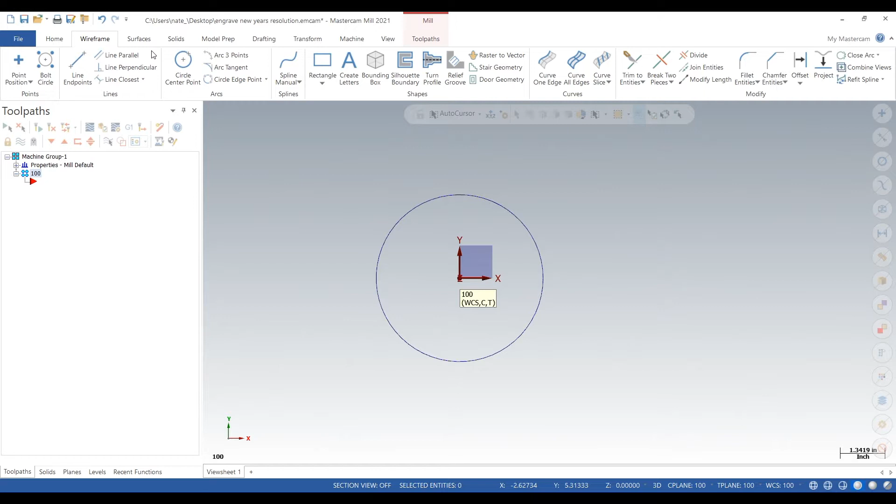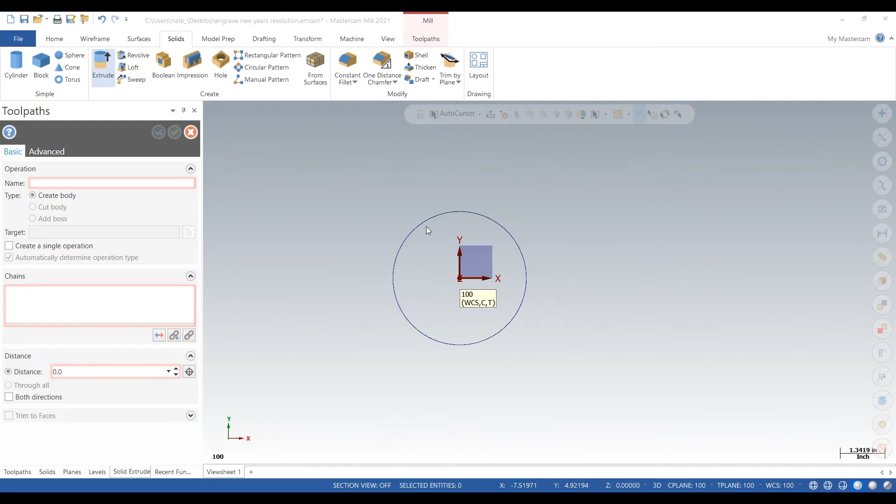Actually, we're going to delete that and we're going to make it 4 inches in diameter. That's a little bit better size. We don't want to make it too big. We're going to go to extrude, and we're going to extrude it down. We're going to make it 200 thou thick.

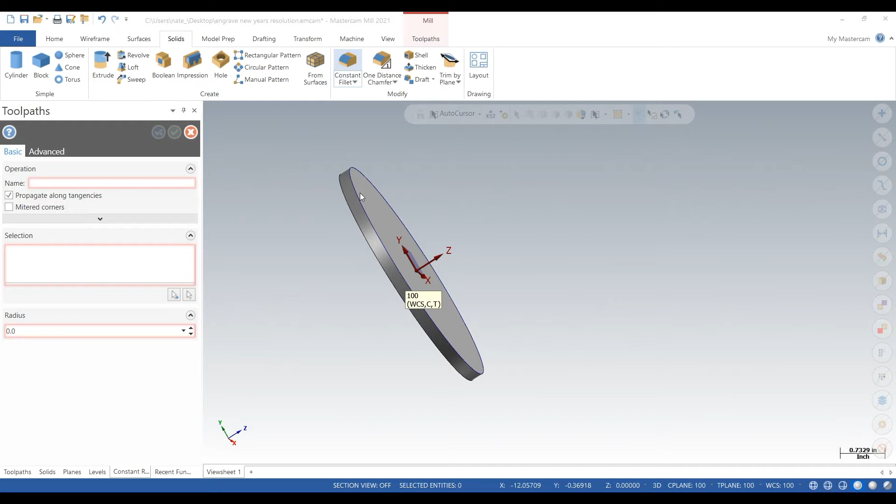Now we're just going to add some fillets on the corners. Make this nice, we don't want anything sharp. Go 50 thou.

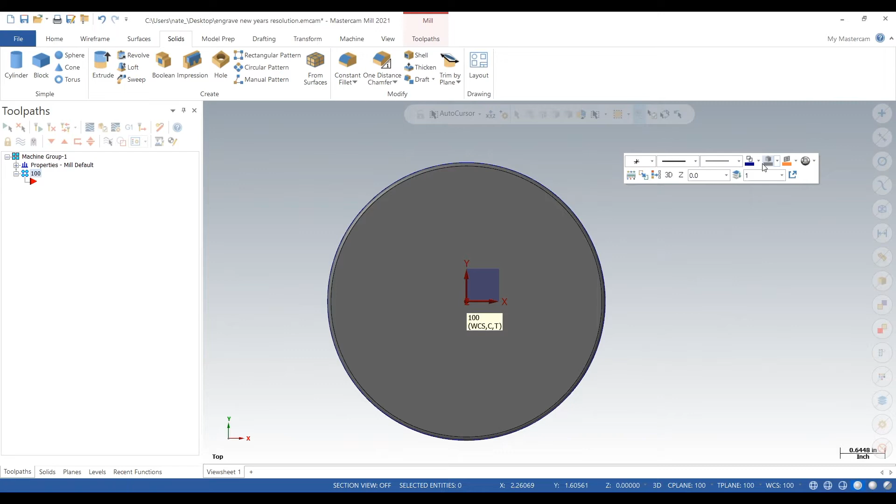Next, we're going to change the color. And the color will be green.

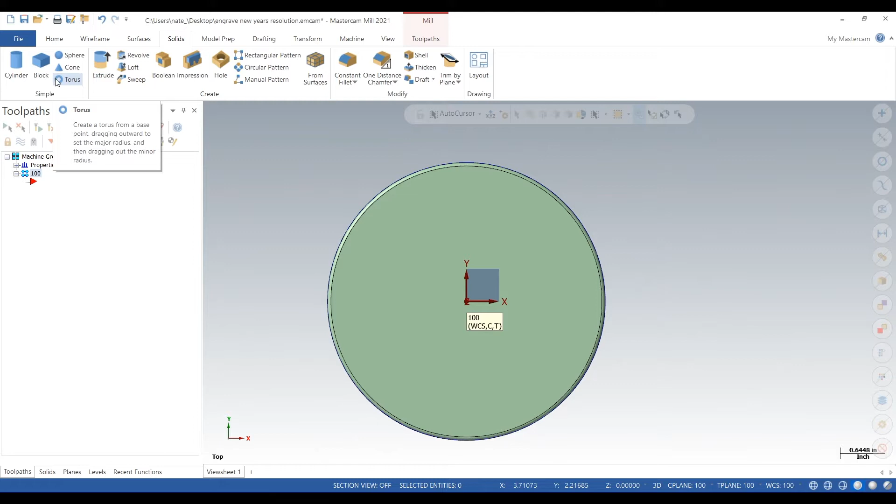Next, we're going to go over to create letters, and we're just going to type in our message. And it's going to be '2022 will be my year.' So we're going to mess around with the height so we can get this thing to fit on there. And we're doing this entire video unplanned, so we're just freehanding it basically, so it's not going to be perfect.

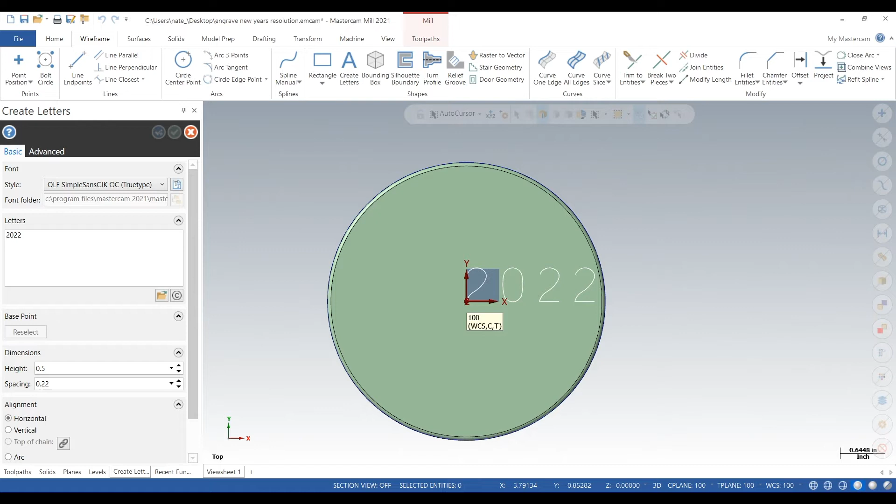Now we're going to go down, we're going to type in 'will', space, 'be', space, 'my', go down a couple lines, 'year'.

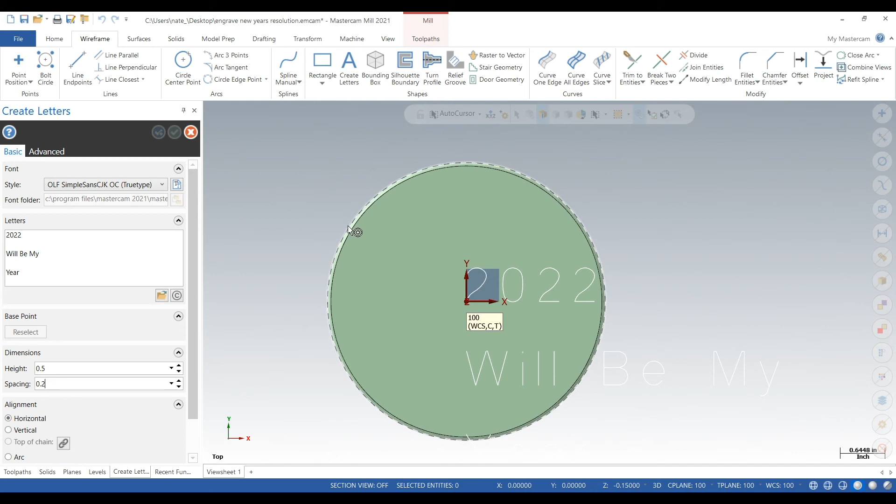So the idea is try to get this centered on this coaster. So we're going to shift things around in the letter box.

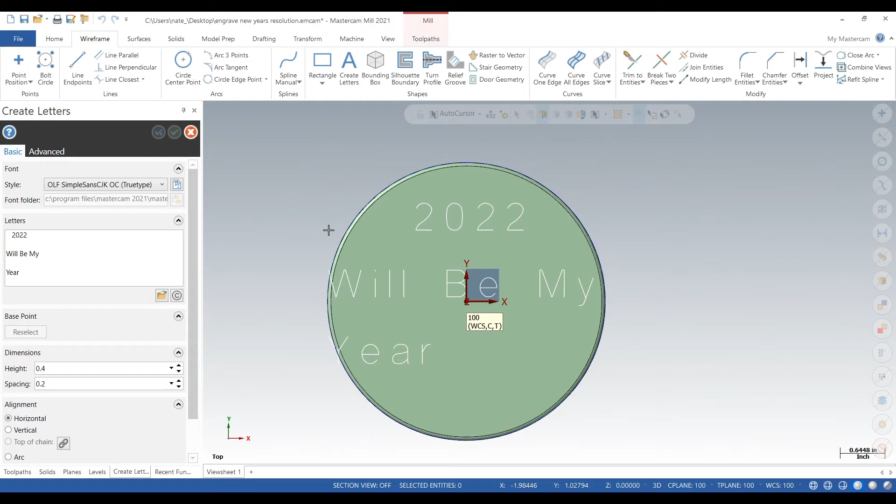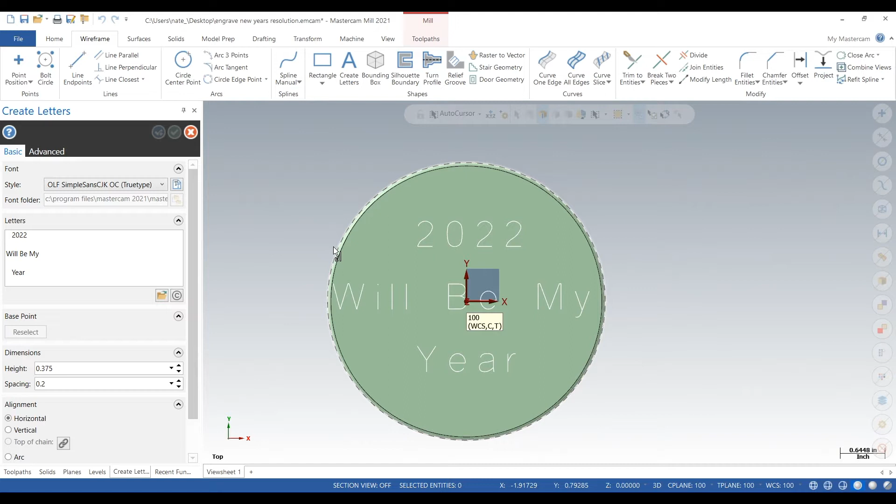We'll go down a font size. Go down another font size. And here we just kind of screw around and struggle trying to get this thing on here, but eventually we get it in there perfectly.

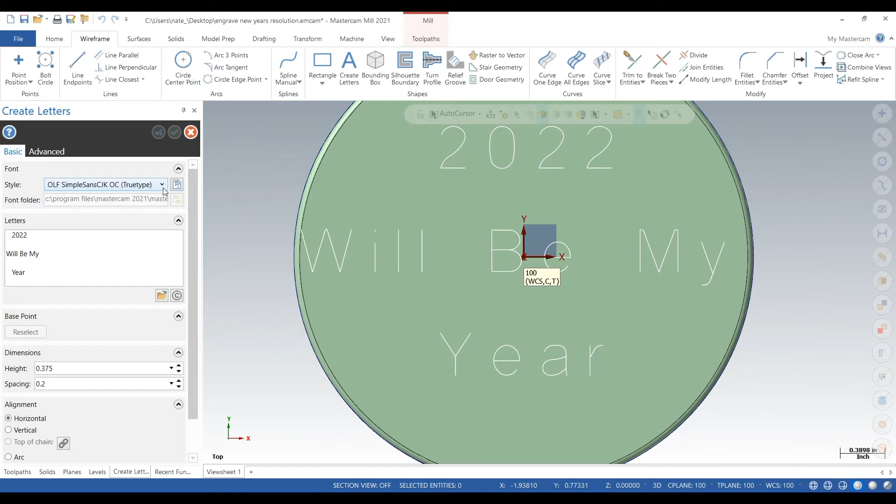Now you can write down whatever you want, actually. You can do my 2022 New Year's resolutions, whatever you want, whatever kind of cool message you want to do. And you can actually change the style of the font too. So they got all types of stuff that comes with Mastercam.

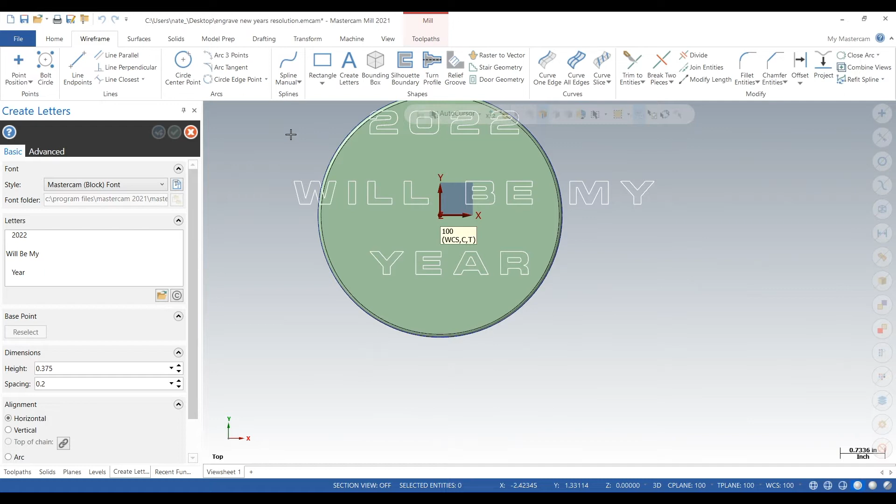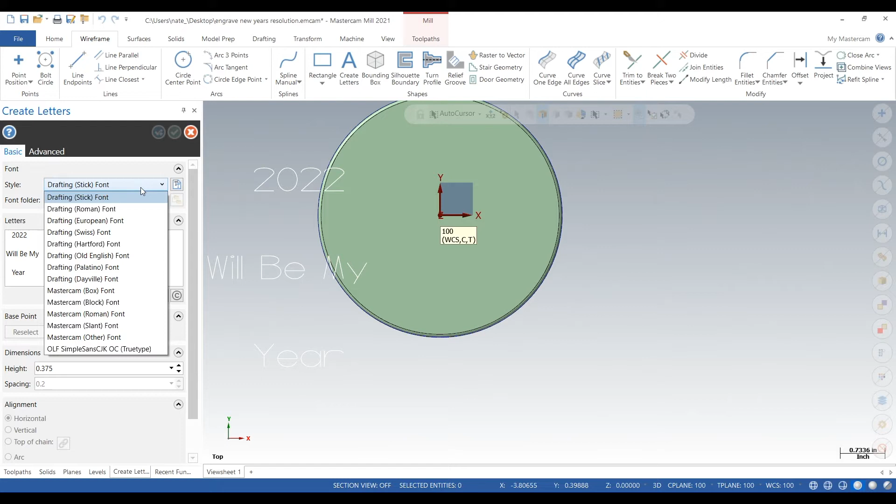Palatino, block. Slant. Roman. We're just going down to True Type.

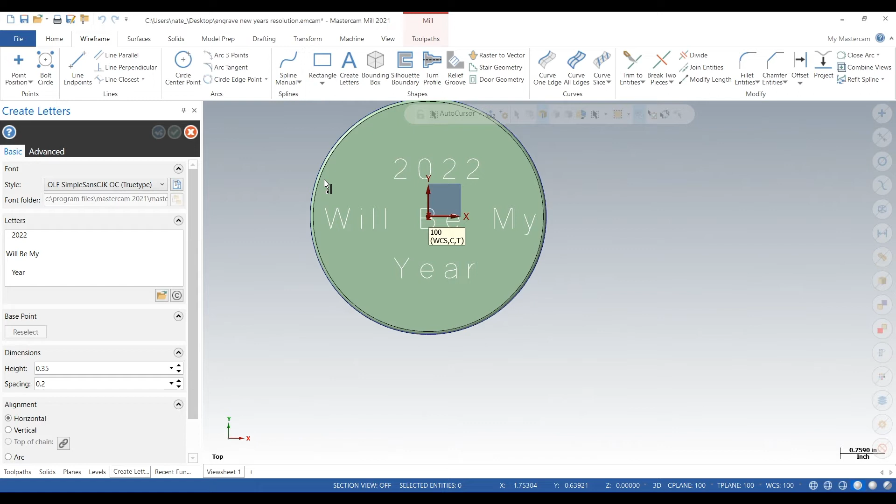So we're going to change our height to 0.35, 350 thou. The idea is to get this centered just by freehanding it. You can create a point and then find the center point of your message and then align those points. But for this video, it's just a fun little video and we're not going to get super accurate with it, just enough. So that looks pretty good.

Now that we have designed, we have made a solid, we wrote our message, now we want to get ready to machine it. So we have a plane 100. We want to go to levels, and we need to set up some levels, just so it's a little bit easier to add toolpaths. So level 1 will be solid.

Level 2 will be wire. And we're just going to move the wire from level 1 to level 2.

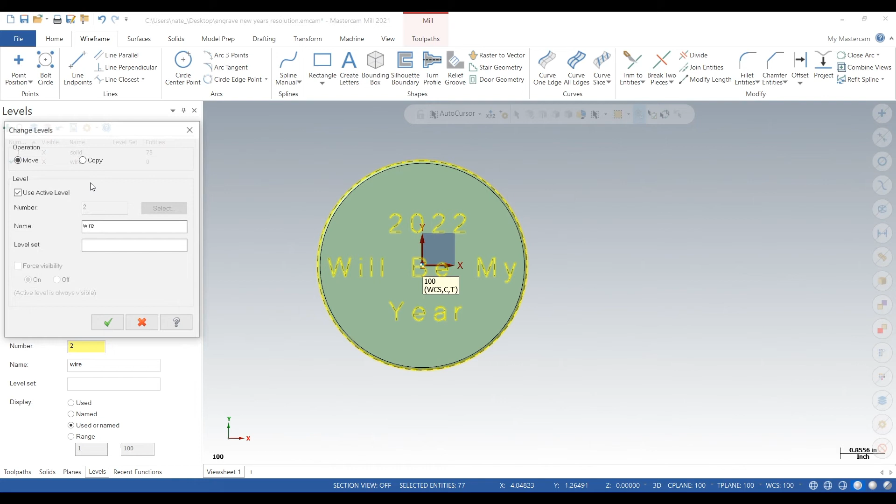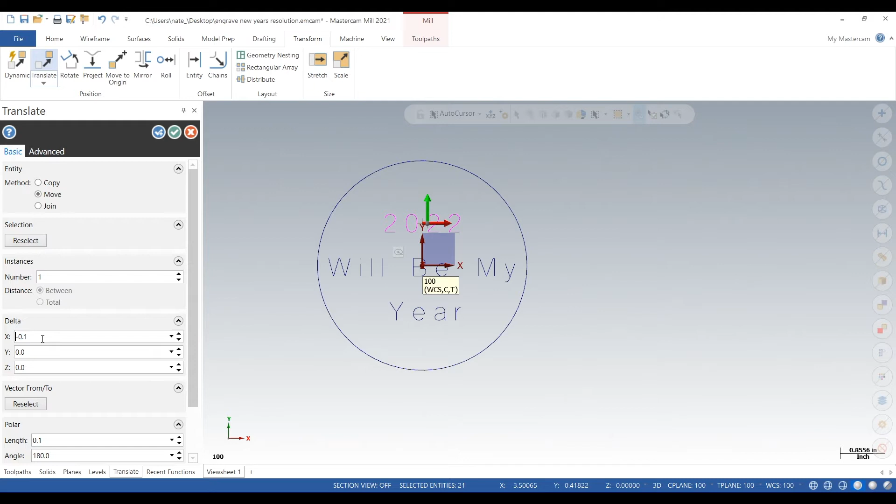Now we're going to select 2022, we're going to translate, and we're going to move this around so it's a little bit more centered. You can tell just by looking at it, it's a little off. So that looks about right. Let's clear colors.

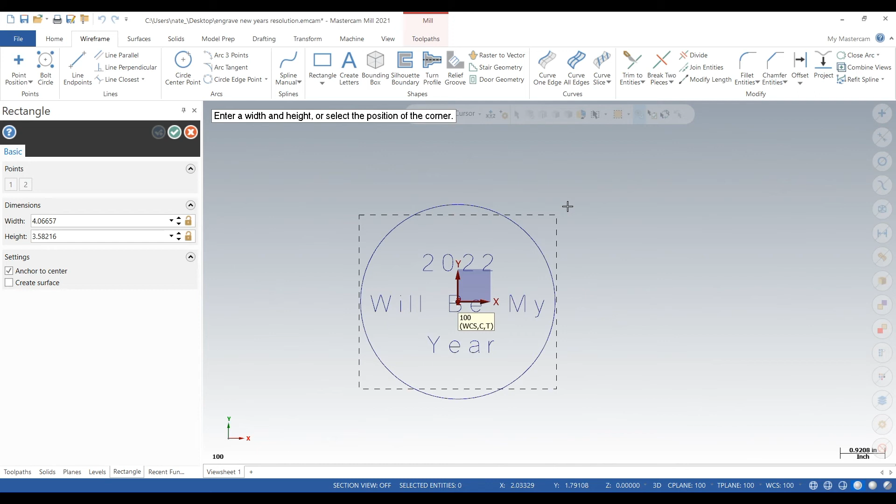Now, what's next? Now we're going to add stock. So this is just our solid piece. Now we need to add some stock so we can verify our program. Let's go 4 3/4 by 4 3/4.

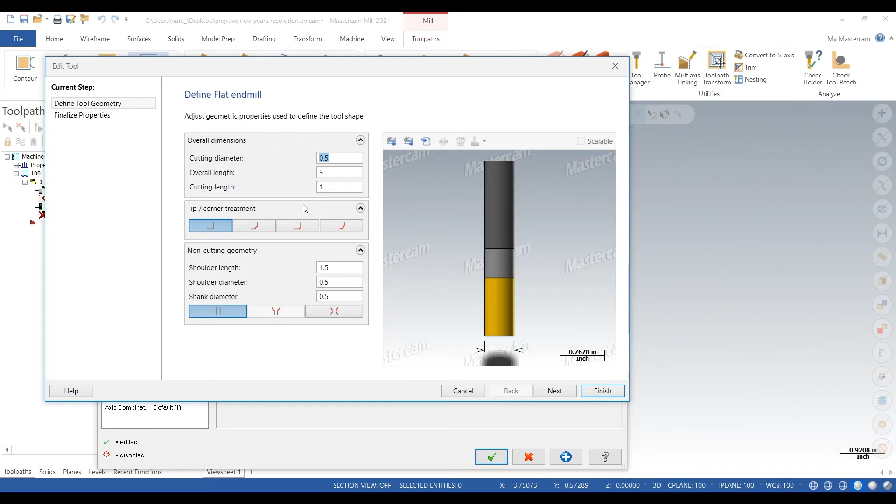And now we're going to add some toolpaths. So we're going to do a 1/2 inch end mill. We'll go to Edit Tool. And we're going to modify it and make this one a bull nose. So we'll get a 20 thou radius. Click Next.

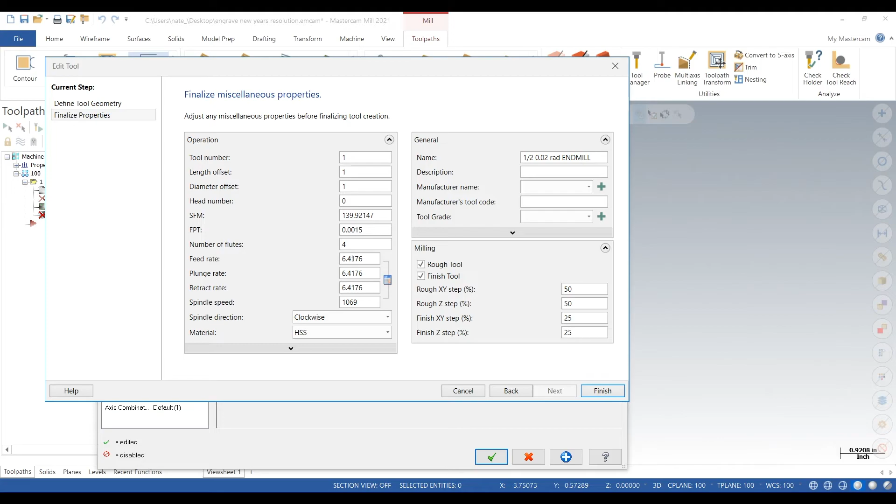Change that all to Tool 1. Change the name, see how it's highlighted? Mastercam nose, change its name to a 20 thou radius. Because if you make a setup sheet, it'll say flat, which it really has a radius, so that's important.

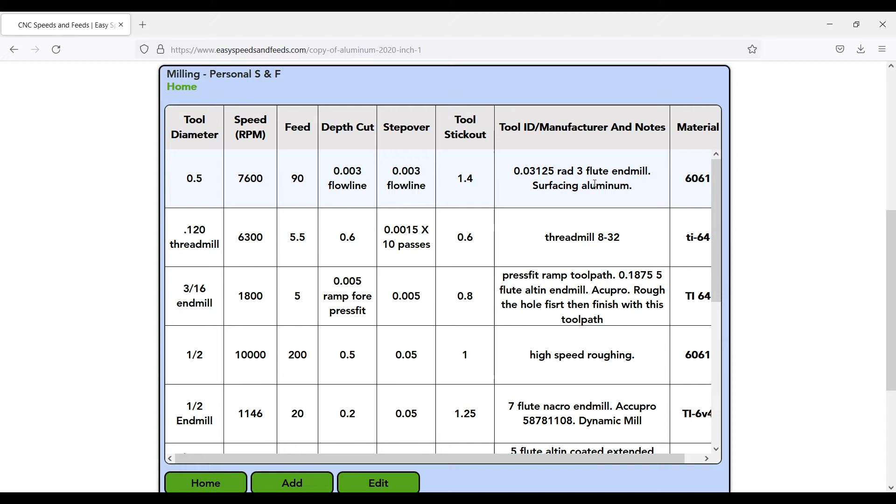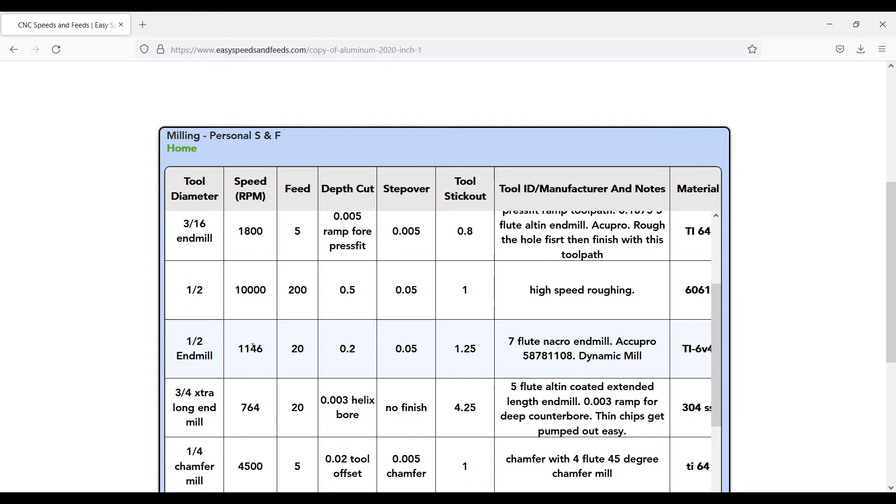So we can go back to aluminum. We have nothing, so we're just going to calculate something out real quick. And we'll give it 1,000. Teeth, we'll do 3. So we'll go 7,600 and 115 inches a minute.

Okay, click finish. There's our tool. Do a zigzag for the face. Step over, that's fine.

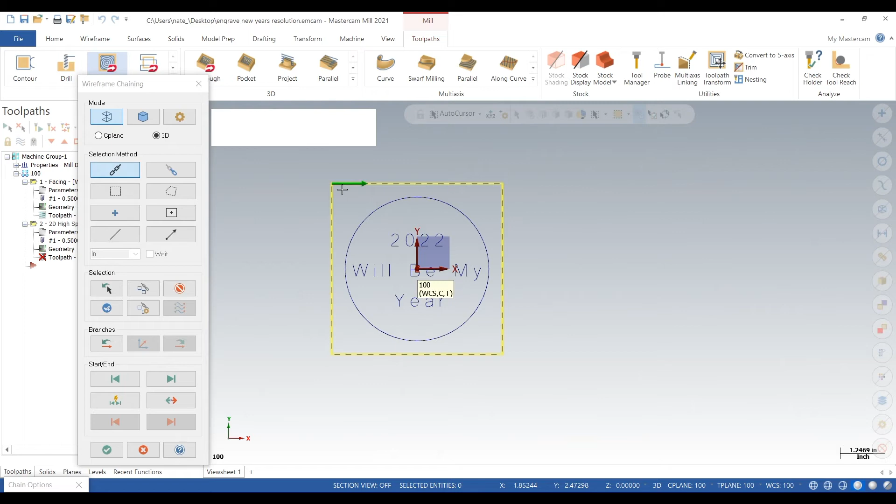Next, we'll do dynamic mill. We'll select our stock we created, and then we'll avoid the part. Click the check.

You can use the same tool. We'll hit reinitialize feeds and speeds. Cut parameters. We'll go to linking. We'll go minus 300 because it's about 200 thick.

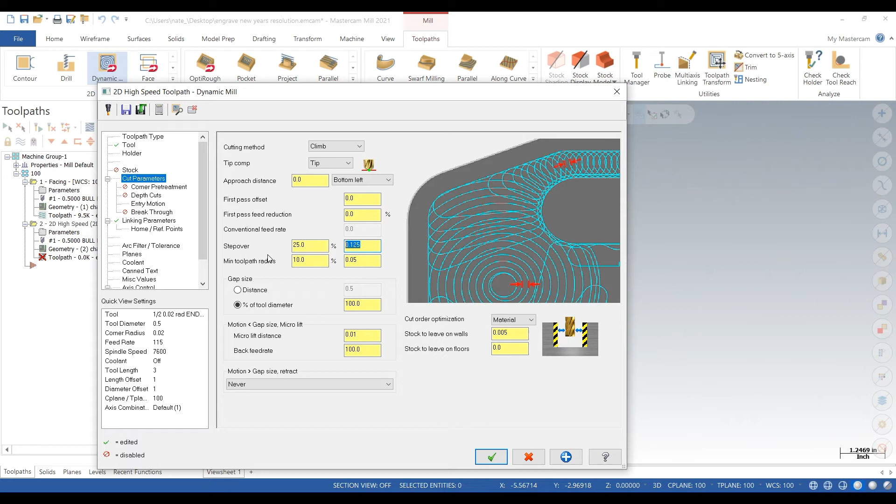Step over, give it a 125 thou step over. Click the check.

So it didn't really generate the right toolpath, so go to geometry and click from outside. It was trying to do everything inside the line, so we'll go outside the lines. There we go, that's looking good.

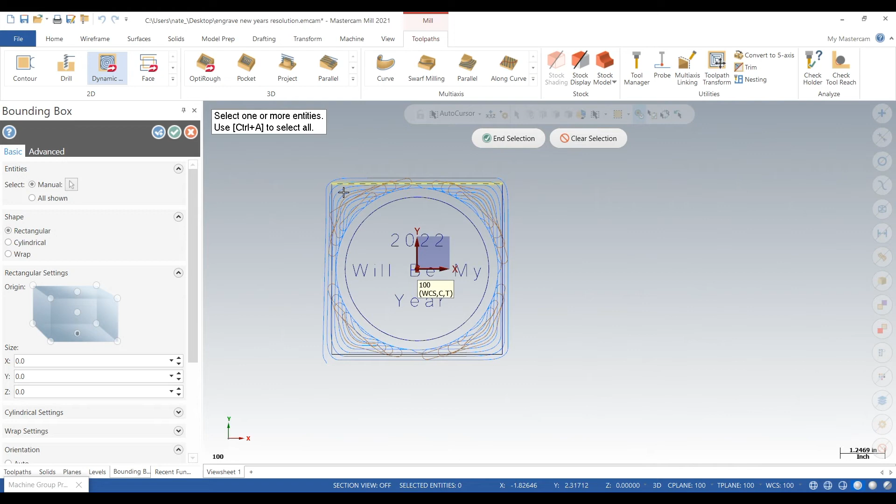Next, we'll set up the stock. Should have done this earlier, but we can do it now. We'll do a bounding box, and we'll just select what we drew earlier, that 4 3/4 by 4 3/4. Plane, use the top plane. Our stock is 1/2 inch thick. Select the center where our plane XYZ0 is.

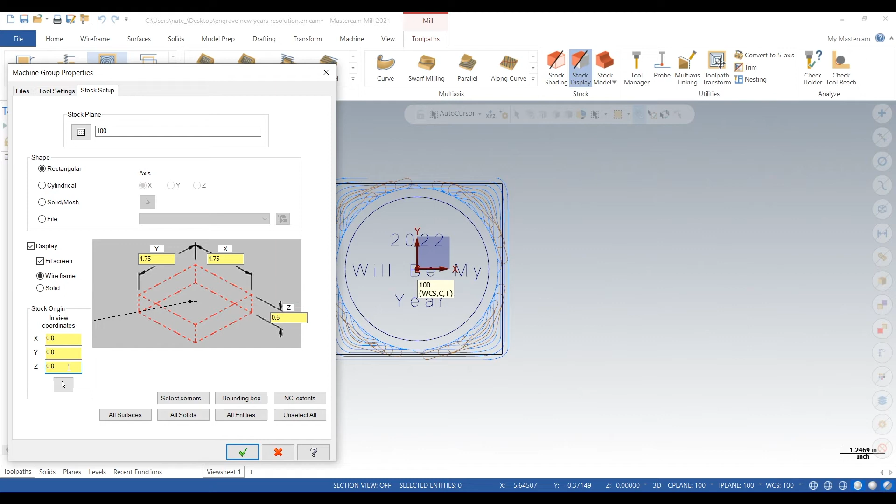And we're telling it is 10 thou. Our work coordinate 0 is 10 thou below the stock, so it's going to take 10 thou off the top if it machines to Z0. So we're going to do a quick verify.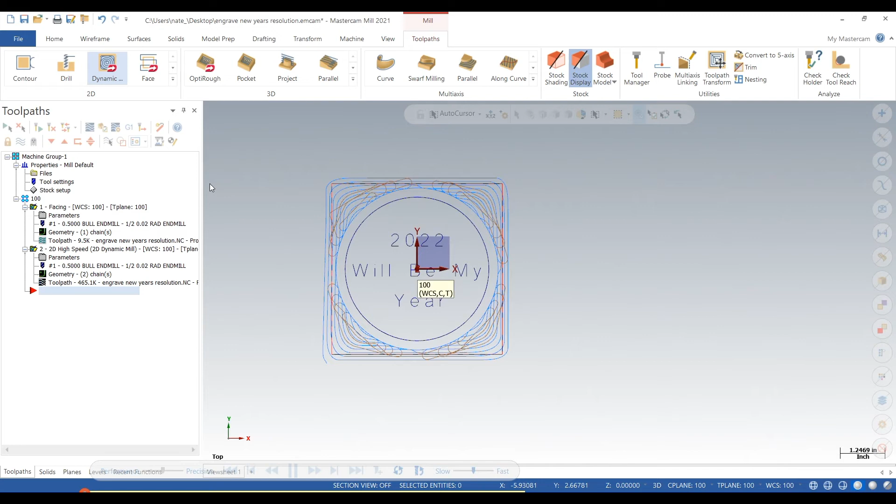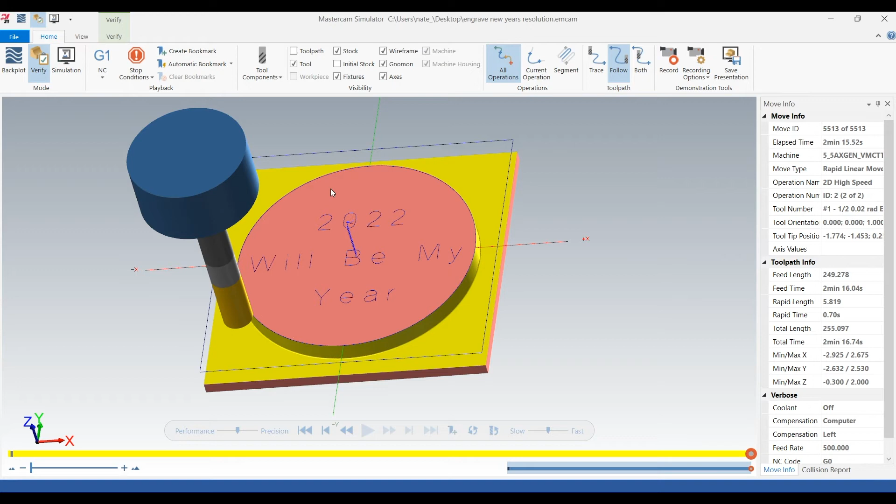So we faced it and we dynamiced it, but it does not look like anything came off the face. That's kind of why we use verify, is we can tell exactly what's going on. So we go into facing, go into cut parameters, and yeah, it's leaving 50 thou. So we'll type in 0 there, and that takes care of that.

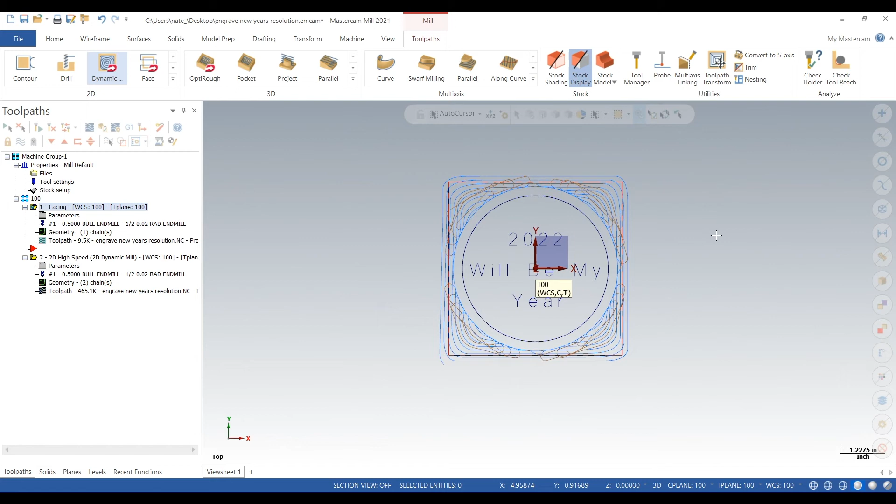And now we need to continue machining this thing. So we'll do a contour. Move our red arrow down.

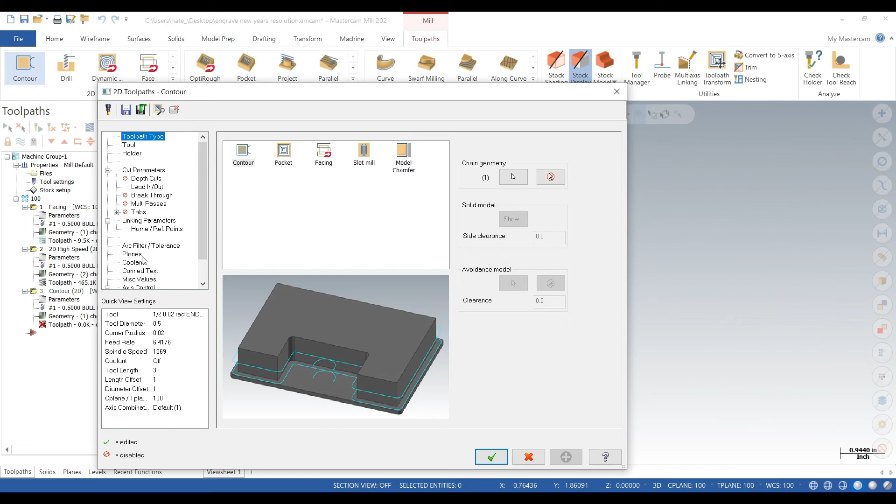Do a contour around the part because it's leaving 5 thou from that dynamic mill. Use the same tool. Reinitialize speeds and feeds we saved. We could go minus 300.

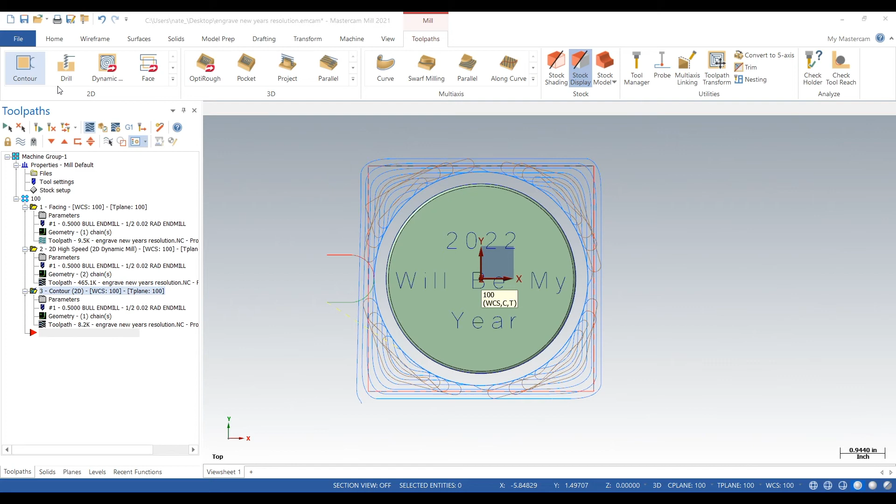Okay, so now we need to take care of this little fillet. This is so we don't cut our hands when we're handling this thing.

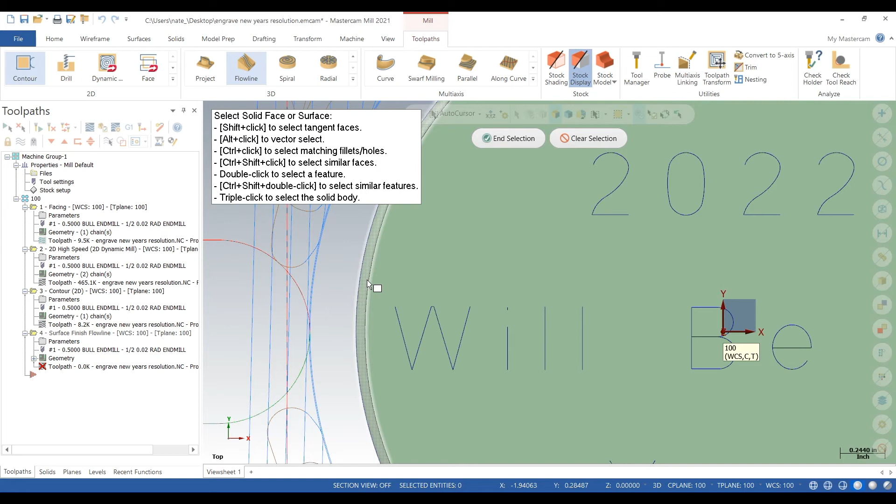We'll check the cut direction. That looks correct, so it's going around the part, engaging the radius of the tool with that surface.

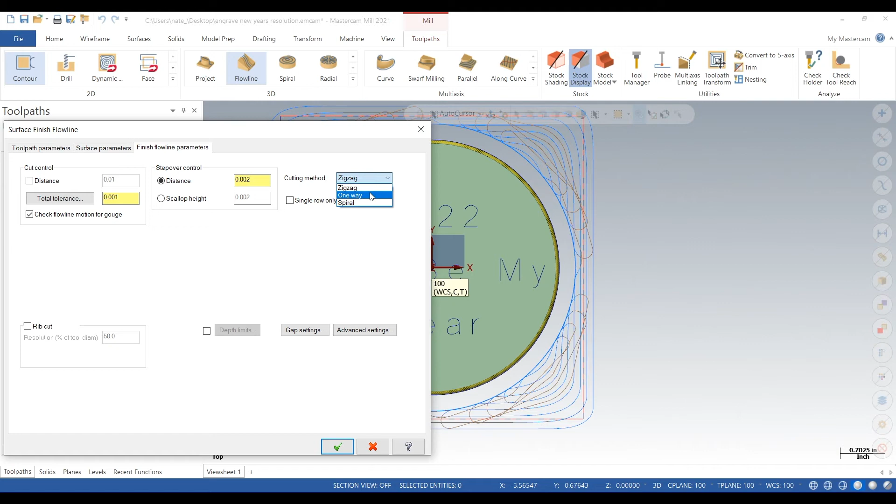We'll reinitialize the speeds and feeds. Finish flowline parameters, we go to distance, we go 2 thou. So it's only going to take out 2 thou at a time, so it'll give it a really nice finish. There's going to be a lot of passes around the profile of the part.

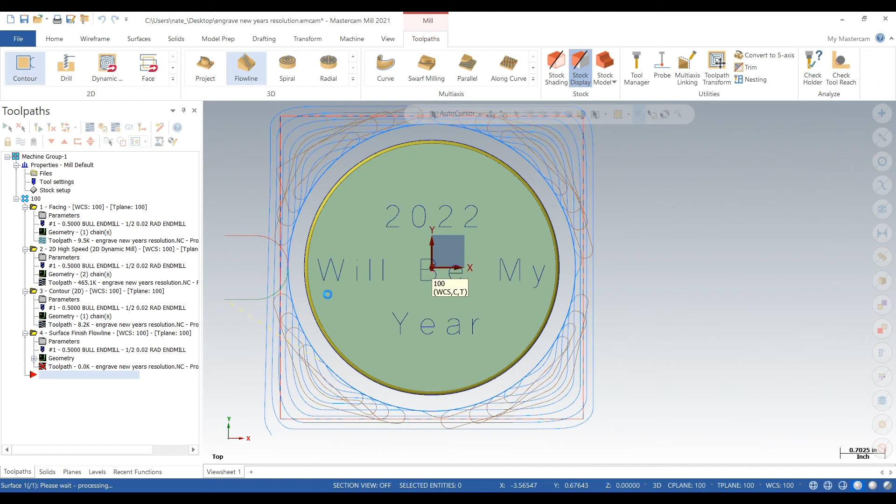So look at that, it took a minute, but it looks like it generated a nice toolpath to take care of that fillet.

Next, we will be doing the engraving. So for this one, we selected the wrong geometry. We're gonna try that again.

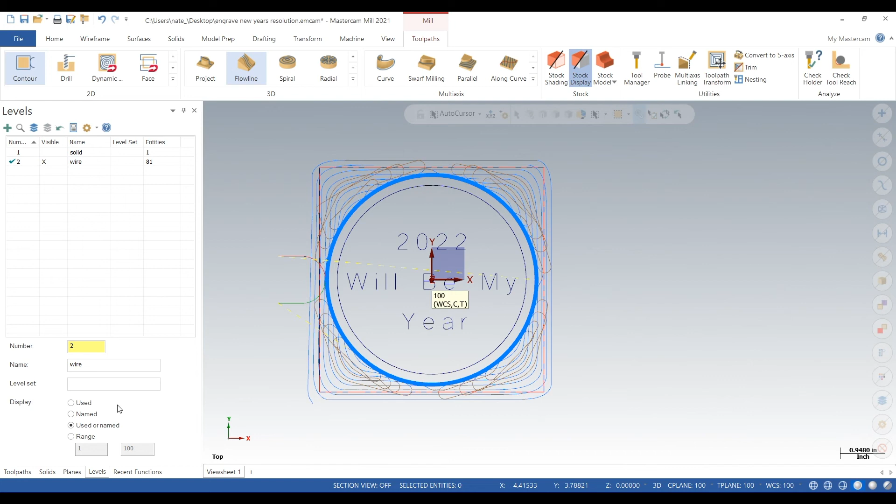We'll use a contour. And instead of selecting every little thing, we're going to choose a box. We're going to drag the box over the letters. And we're going to select a start point.

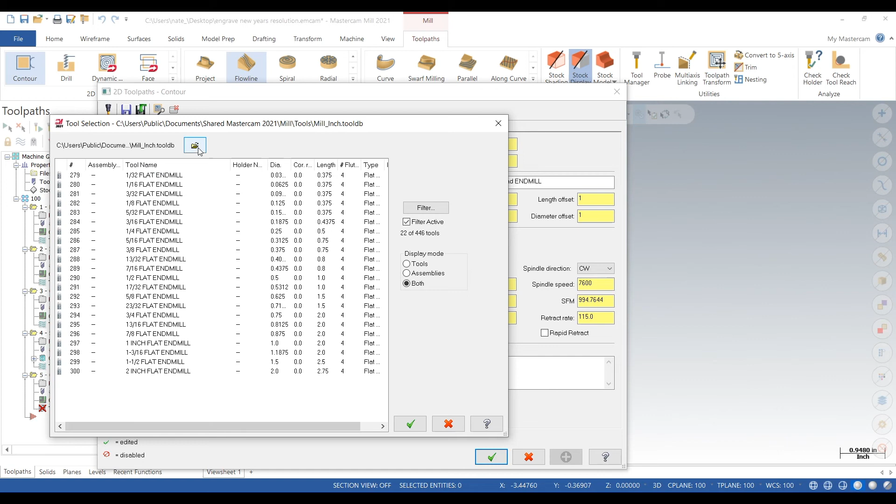Now for here, we have to do a couple of things to get the engraving just right. We're just going to create a tool. So hit Create Tool, ball end mill, and we'll use a 1/8 inch.

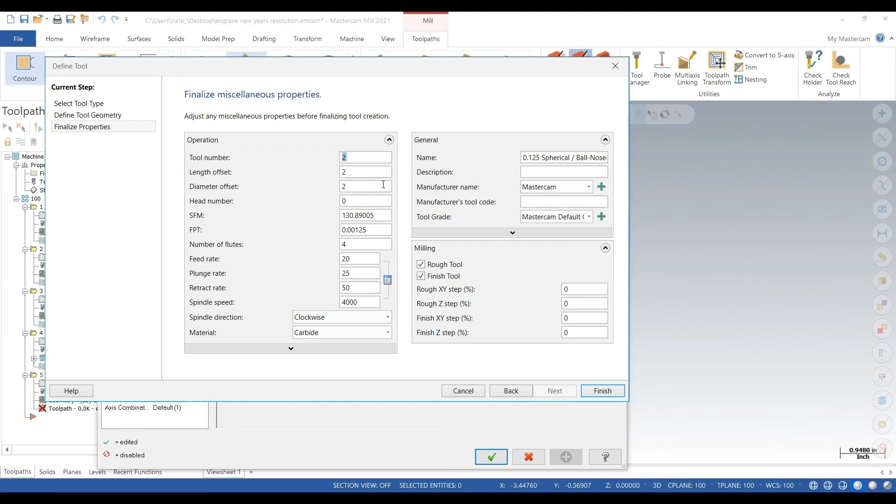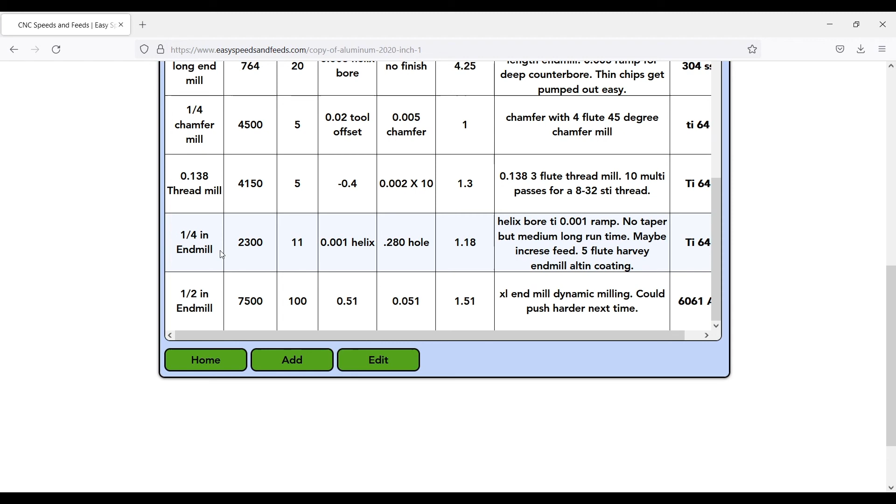So we go back to Easy Speeds And Feeds, check our data set, see if we have anything in there. Nope, so we'll just calculate something out real quick.

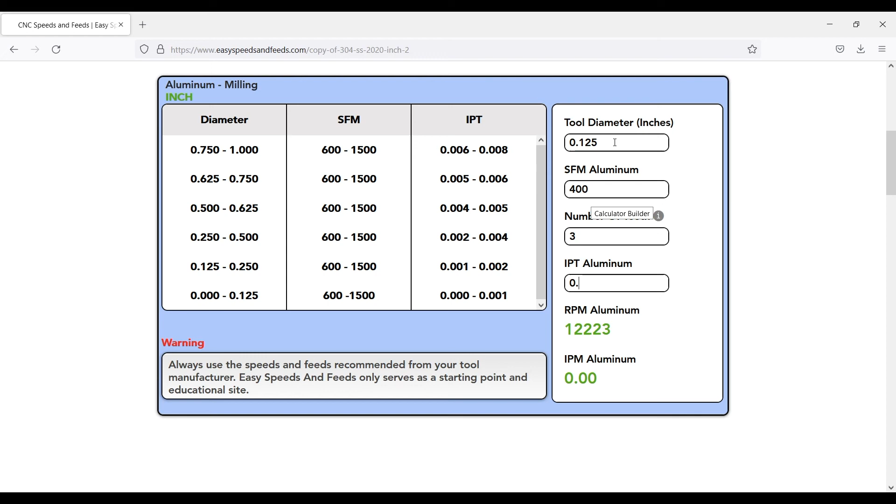And the thing is, when you calculate something out, you'll always be putting your tool in the best position to make the best cuts and have the longest tool life. If you're concerned about money at all, you know that tool life is very important. So that's just like a step you can't really skip.

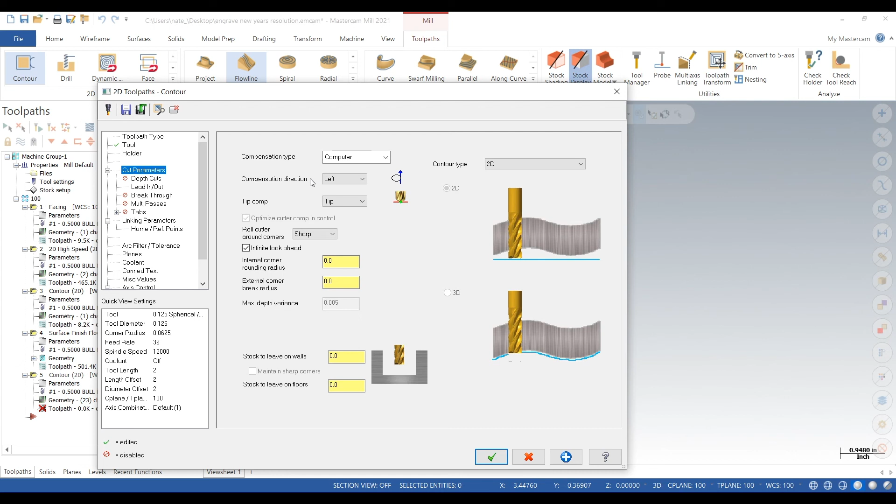Click Finish. Compensation, turn to off, that's important. Next, lead in, lead out. Turn that off. So it's going to go down the middle of that wireframe, and there's going to be 0 lead in or lead out.

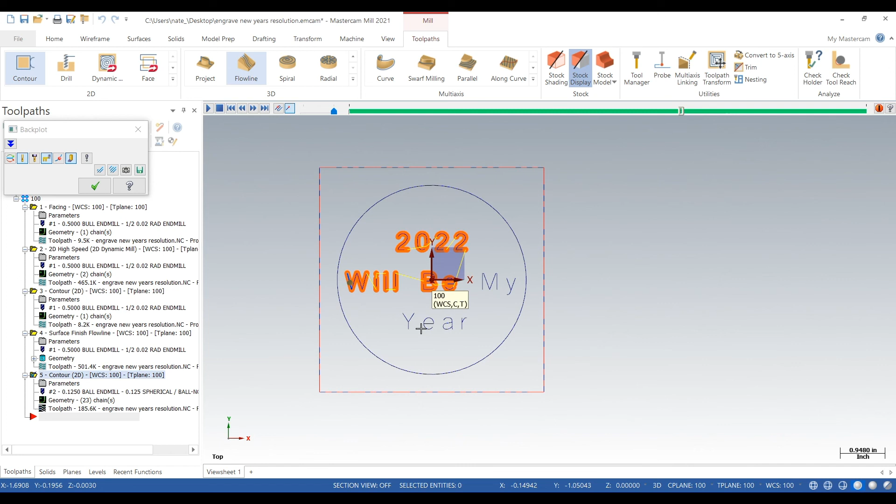Depth, all we need is about 3 thou. Planes, that looks correct, and it generated it. So from what I see, that looks pretty good. No lead in, no lead out, and it's not on one side or other of the wireframe.

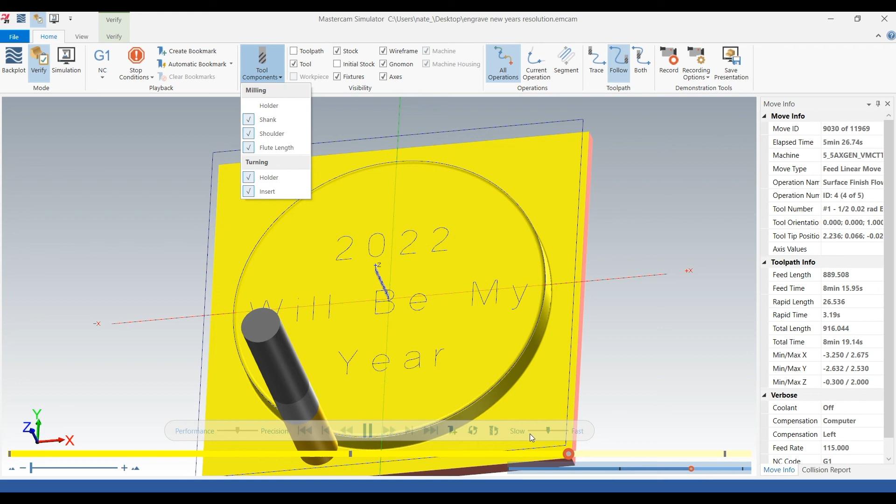So we'll throw it all together into Verify and let's see what we got. So it's facing it this time, dynamic milled it, contoured it. Now it's doing that flow line, 2 thou per pass around the outside of the part.

We'll slow it down. So yeah, it's just engaging that radius against that fillet. Turn on our color loop so we can see better, and yeah, looks like our bull end mill is doing a good job.

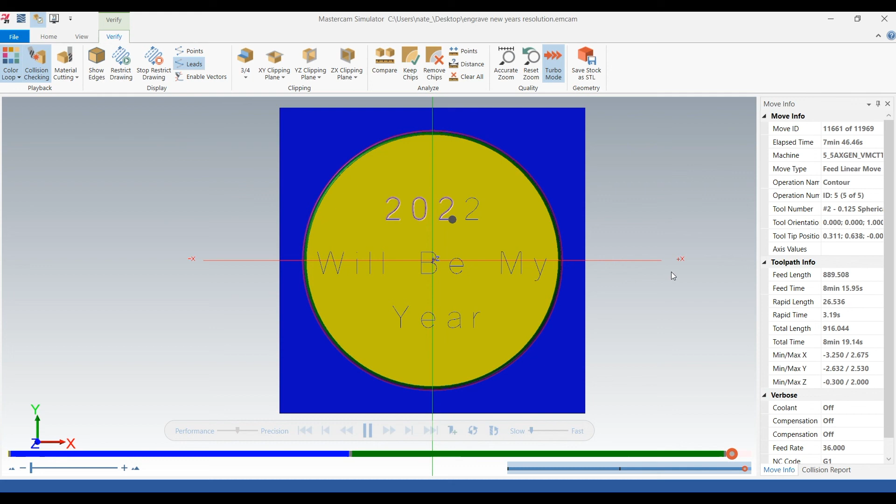Awesome, looks like it did it.